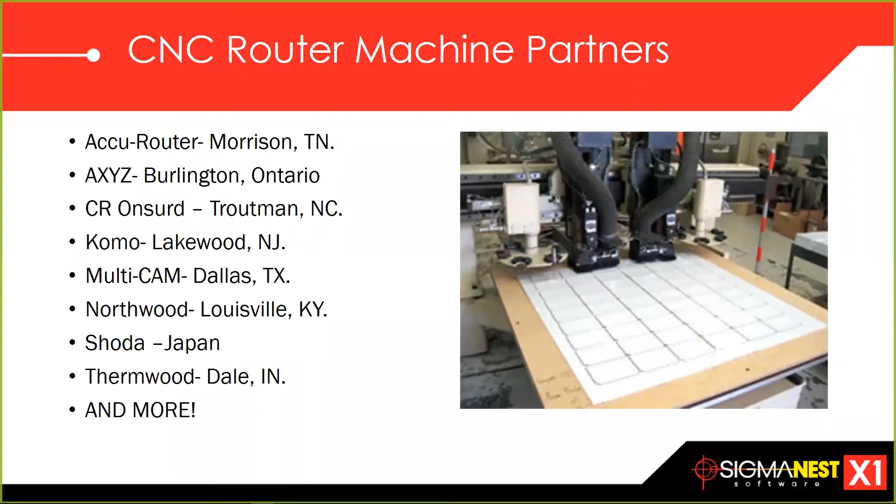All right, so what I wanted to do today is talk about the different tools we have inside SigmaNest that benefit the router community. I wanted to go through some real live scenarios. This first scenario goes way back to when I first got my start into the CNC router world, I worked for a company in Morristown, Tennessee named Burkline, and this is a typical frame that they have.

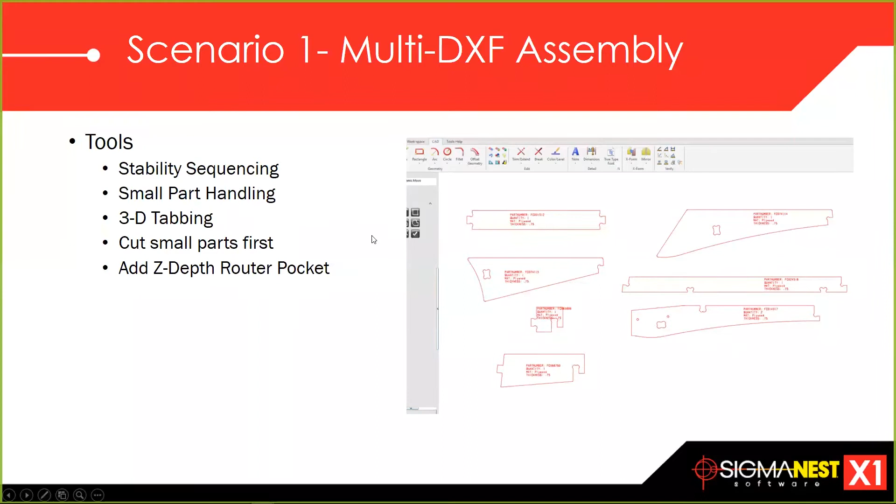So let's go ahead and jump into the technical side, and I'll explain some of these tools as we're seeing them on the screen here. First of all, we're bringing in a DXF. The DXF we're bringing in is a multi-layered DXF that's got dimension layers and all kinds of different things on there. But we're turning those layers off here on our interactive mapping screen.

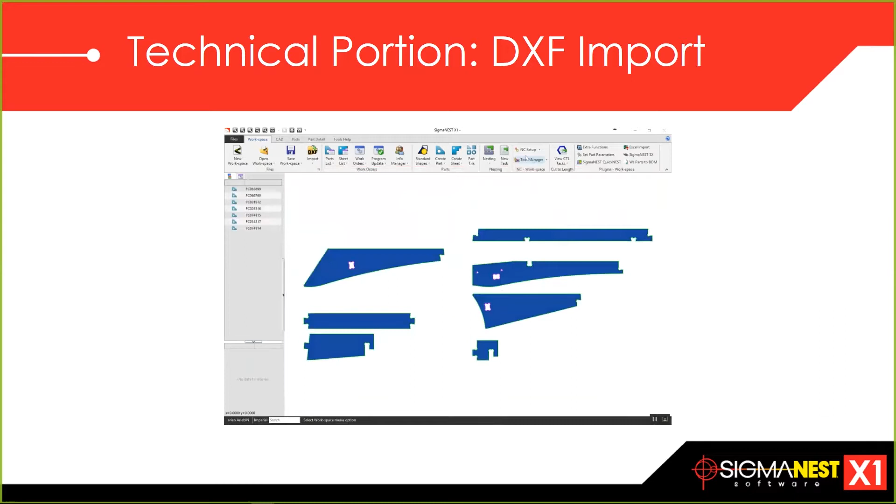I'm also zooming in there to show you that we have some parameters that will automatically be populated inside SigmaNest. Parameters like material, thickness, quantity, part name, all of that can be mapped over from your AutoCAD and brought straight into SigmaNest. Also, we can put grain constraints on, as this particular frame we're nesting is 3/4 plywood.

Going over and building up our nest here, our task, we're going to get 7 complete units in here. I'm using the user 2 nesting algorithm here, and that tends to give me the better automatic result that I'm looking for.

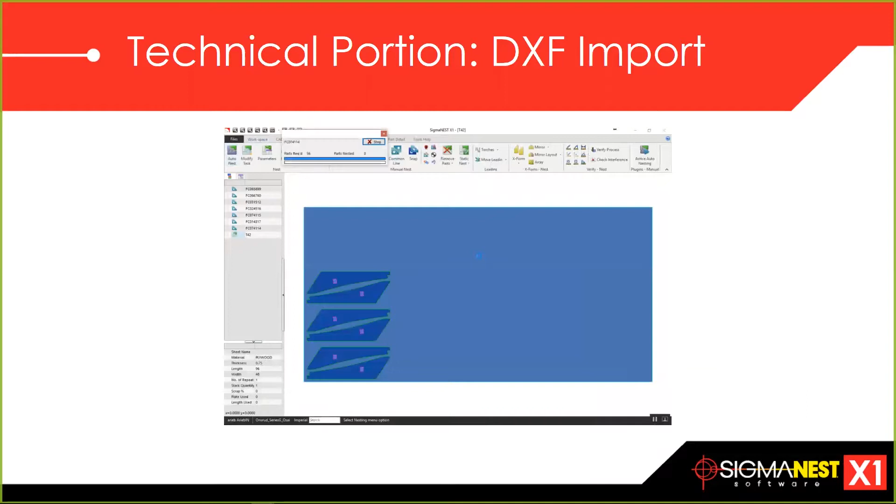Also, we're using a tool called small part handling, so parts that fall under 8 square inches will get a bigger part-to-part spacing. And as you guys know, a lot of times when I'm done, I'll kind of hit the bump command and space out the smaller parts and take advantage of some of that extra material there, so I get a better quality cut. I can do that on the fly - that is a unique tool of SigmaNest that I've always loved as a customer, that I can interact with the nesting.

Here's where the stability sequencing comes in, and we're going to show that and go over what that means in just a second. Basically, what we're doing is moving the lead-ins away from where we've previously cut. So here, we put the drills on there, and that was the first process, the drilling.

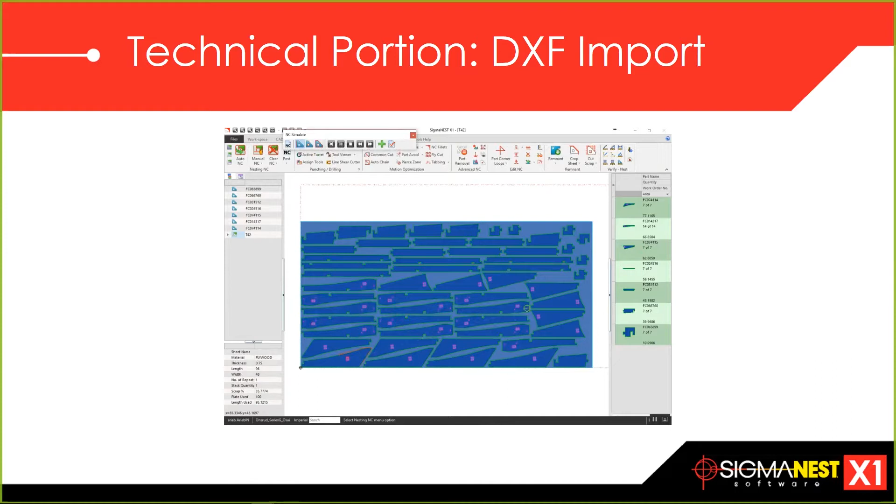Let me zoom in here and show you how SigmaNest is moving the lead-ins away from where we've cut. That means we're going to get a better quality cut with less router movement. This is a pretty amazing function built into SigmaNest called stability sequencing, and you guys can check into that a little bit more later with our technical support team.

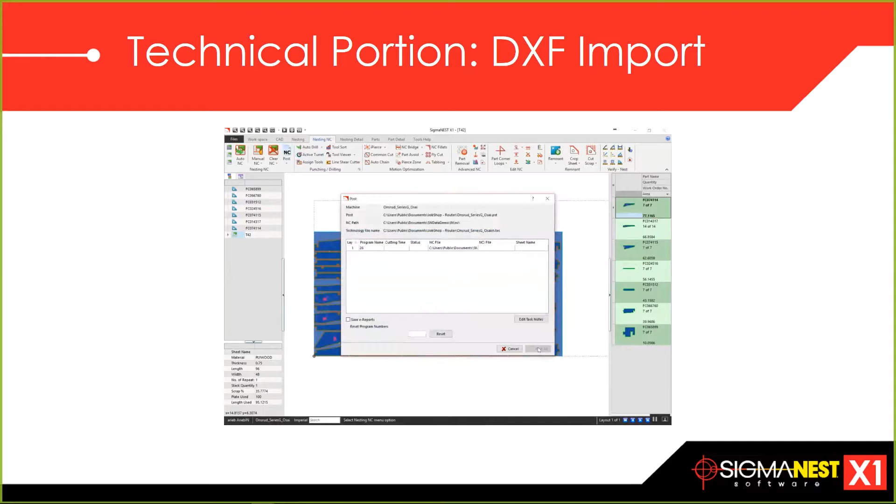We're going to go ahead and post this out here for our router, and then print out reports. That's one of our technical slides there I wanted to show you.

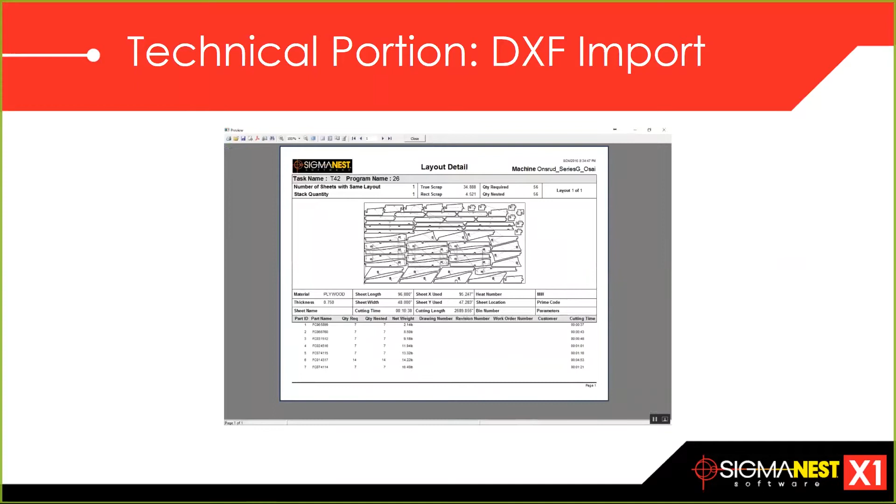All right, so I want to go in a little bit more detail here. The other tool I wanted to show you that I think is pretty amazing is the ability for us to cut the small parts first.

So this is very common. If you can imagine, this is a 4x8 sheet of plywood here, going towards the upholstered furniture industry. I have a series of small parts here, so my nest is all set up perfectly, and I've got some extra spacing built in for these smaller parts to get a better quality, with more part-to-part skeleton holding these parts in.

But what I want to do is cut these small parts first before I cut anything else, because that's when I'm going to have the most vacuum hold down, hopefully, which is what a lot of the customers out there that work with Sigmatek have - routers that have vacuum suction.

So the way I do that is I go over here into the auto NC, and right here there's a button called NC small parts first. You may have come across it before and wondered what it does, but when you check that button, it's actually going to get all the small parts first, and we're going to show that in the first slide, then I'll show you one other thing that's kind of neat.

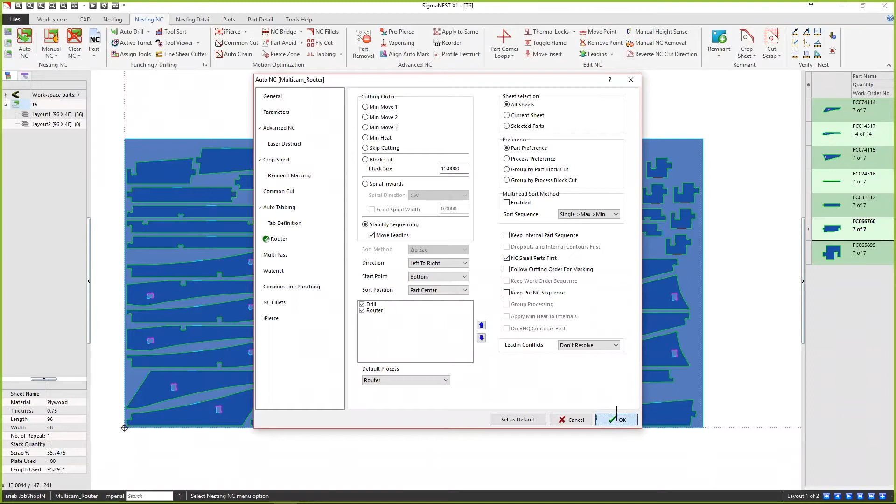So let's do a quick little show here to show how that's going. We're actually using the stability sequencing and the small part handling at the same time. So here we're cutting out the smaller parts first - this is a very common way of cutting with the CNC router.

So we get rid of the small parts, we go ahead and cut them up. You could even tab them in - you can do the 3D tabbing.

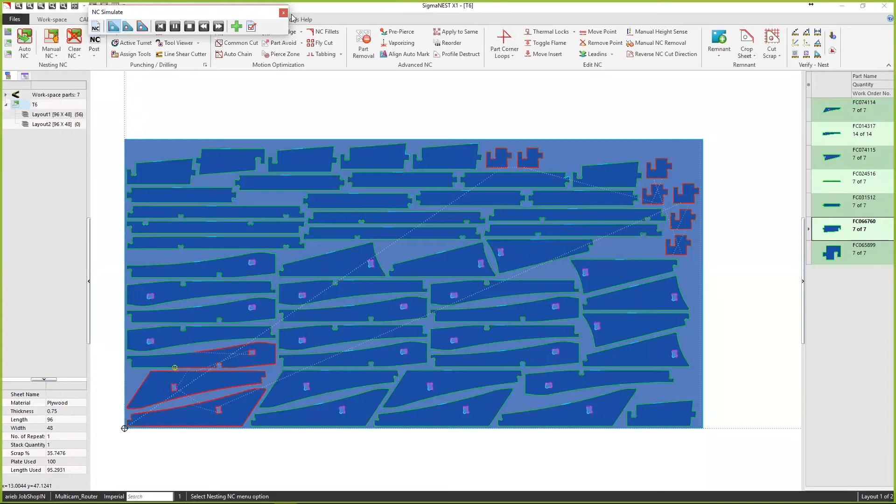Another thing that I like to show when I'm out traveling, and I've seen this a lot, is there's a lot of changes that are made in the design, and some of those changes come in late into the production. What I'd like to simulate right now is a change in one of these parts here.

They're going to actually get a depth pocket cut on this part here. So I can right click and go into part mode, and I wanted to show y'all how we can change the depth of this on the fly fairly easily by using the set depth command inside of Sigmatek.

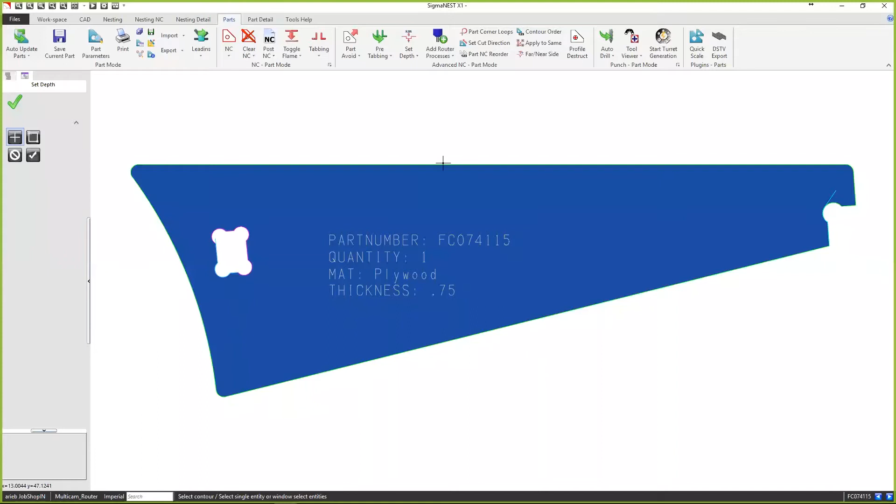So that's located again in the part mode. I just went into part mode on this part here, and under this tab, usually the quality tab is what's coming. So when you first go in there, you hit the down arrow, hit set depth, and then window around the area that you want to change the depth on. A little window pops up, and then you can go down here and maybe set a half depth.

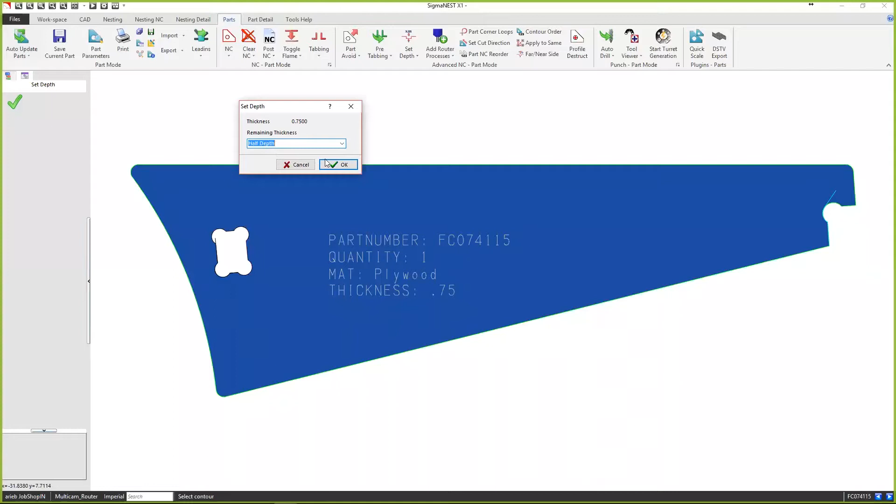And that's really cool because you can change it on the fly. We can go right back here to the nesting, and we can see that change has been made on the fly here.

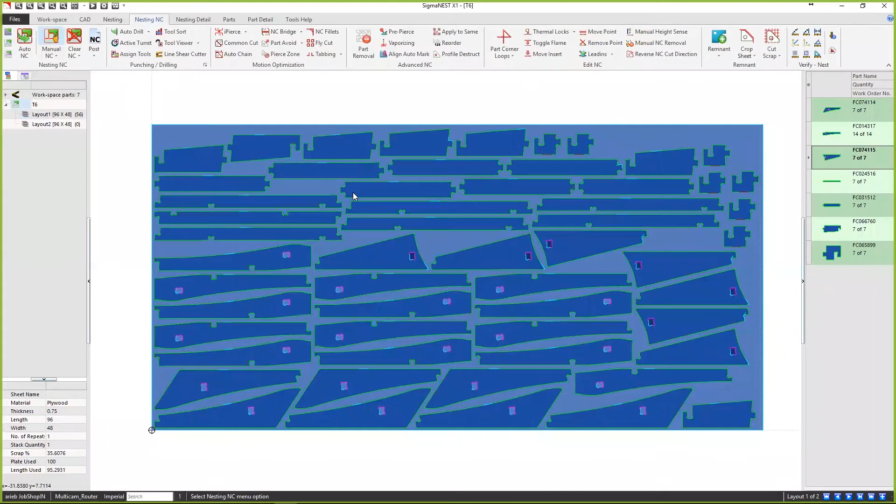So now when I go over here and hit auto nest - I don't mean to hit auto nest, let me cancel that. When I hit auto NC, I already have my pocketing picked out, so I'm going to show you where that's at, right over here under the router tab.

This is something that's automatically checked. If there is some depth cutting, it'll automatically pick up on it, but I wanted to show you where it's at - so we have the auto destruct here turned on. Again, it's a default setting on my computer. So now the router will come in here and do this pocket and go down at that certain depth that I've described. Let me get back here to our screen in a second.

All right, so I wanted to show you those two things. So now we'll go over here and continue. Okay, scroll down a little further there.

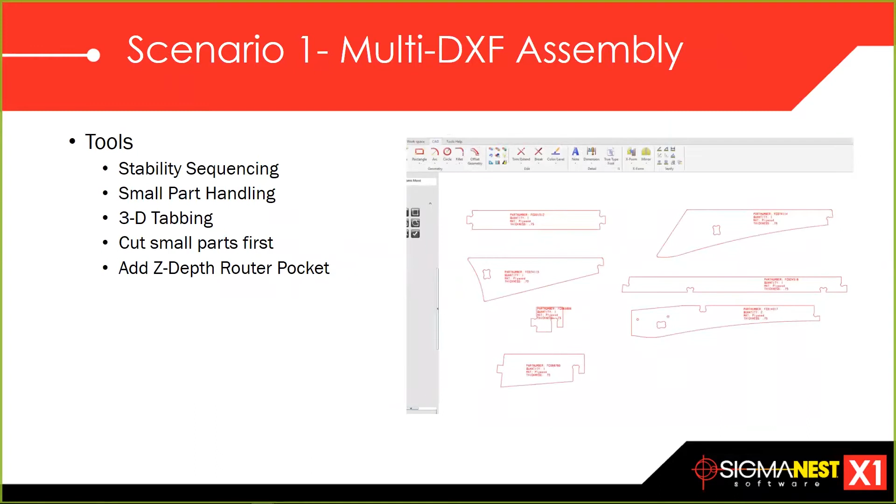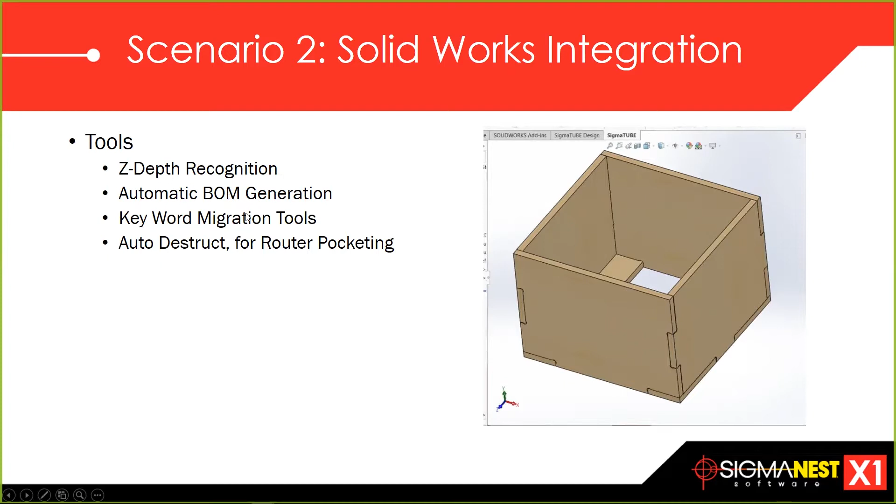So we went over cutting small parts first, 3D tabbing, small part handling, stability, sequencing, and more. Now I wanted to show a scenario with SolidWorks integration. I've designed this inside of SolidWorks, and it would be the same for the Inventor community and all that. I have a little ottoman here that I've designed, and it's going to do some things. The underside of this ottoman has some depths for the leg rails to go into.

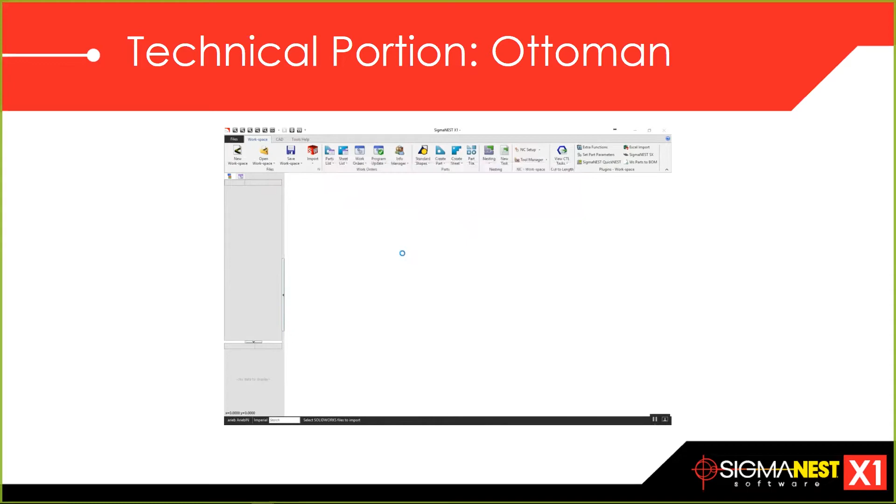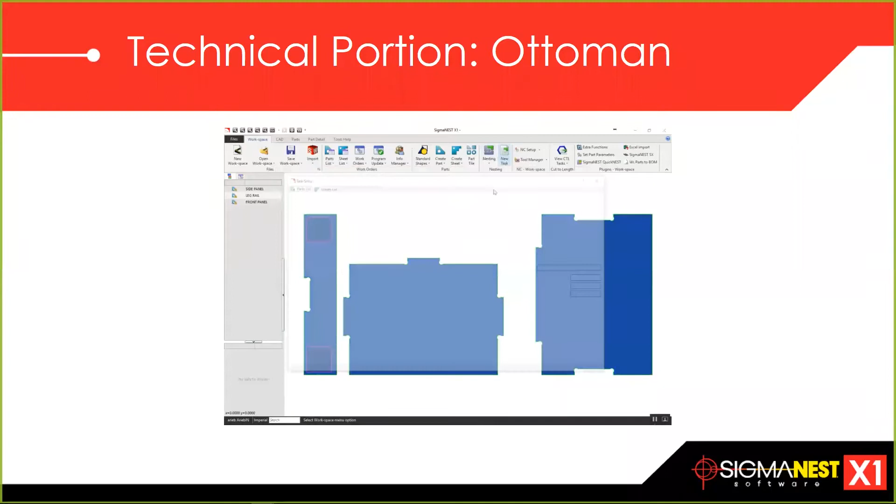Inside of Sigmatek, we can go ahead and import that SolidWorks file. Sigmatek is automatically looking for a SolidWorks assembly file or maybe even SolidWorks part files. This is the solid modeling interface as we're pulling these parts in. What I like about the SolidWorks integration is Sigmatek is able to count the parts that have the same name. You can see these three parts here, there's really two per frame - a side panel, leg rail, and front panel. Now when I set up my job, I can bring that in and put the amount that I want.

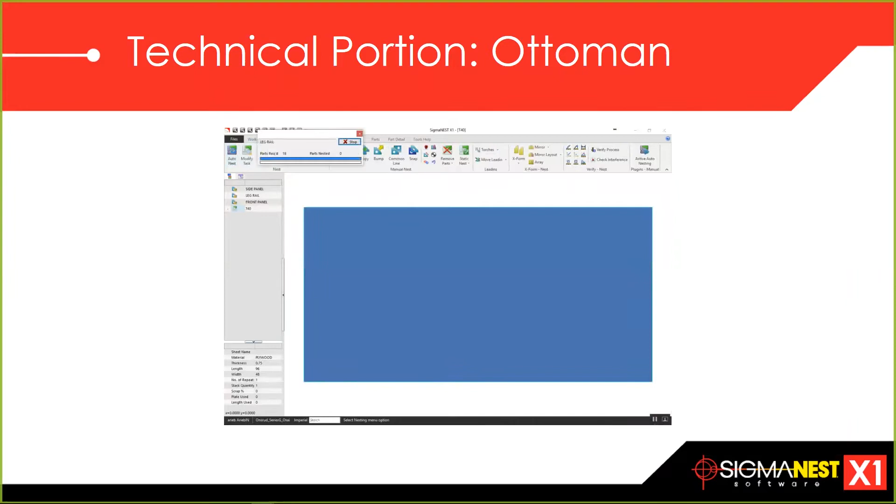Maybe I want to get 3 in a kit here. Again, that user 2 is the most popular one that I've seen most people using. That gives us, when we're cutting wood parts, the best yields. This one here, as you can notice, just like we showed before, there's a depth cut in that leg rail. We already got the router everything set up here as a default, so it's looking for that sort of thing automatically - any depths that might be out there. So here we go ahead and post it, and then it's ready to go out to the machine.

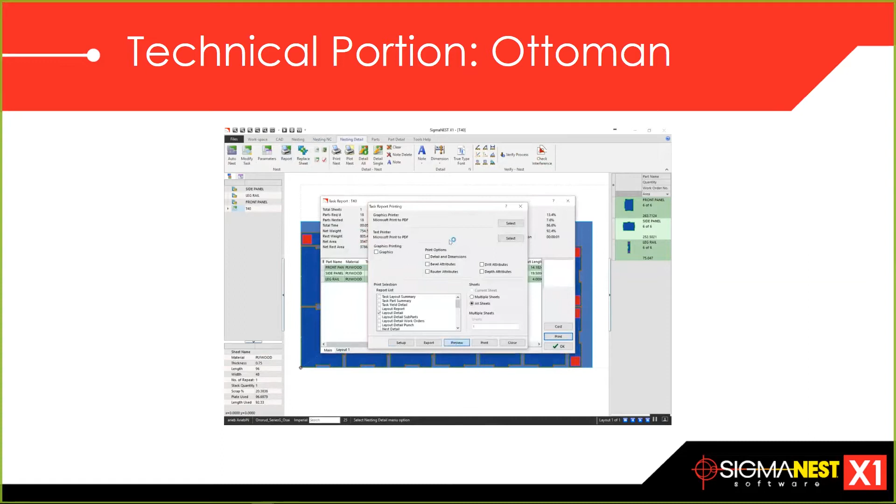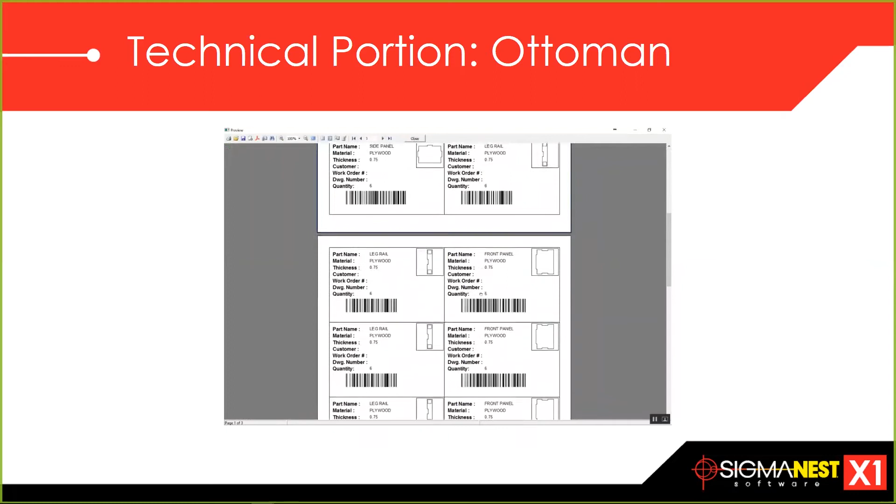A lot of our customers are getting into 3D modeling with SolidWorks, with Inventor. I see that a lot. I see a lot of Solid Edge out there too. Sigmatek here is aligning itself with these CAD packages and allowing y'all to bring those parts in. Here in a little bit, I'm going to show you how we can strip out or maybe not include some of these parts on the migration process.

All right, so this next one here, I wanted to show a little bit of a larger assembly. This frame here does have this 4/4 lumber part. And you'll have to forgive me, but my background is upholstered furniture, so all these tools that we need to drive plastics cutting, metal cutting - there are different tools that are unique for them. But my focus here is just really wood router cutting.

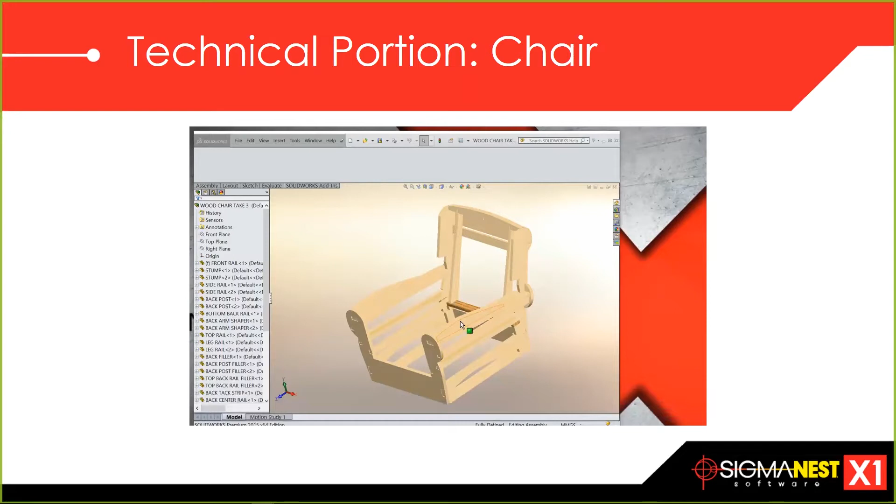All right, so we'll go ahead and do a quick little show here, a little technical. Let's fly out here and show this. Okay, so.

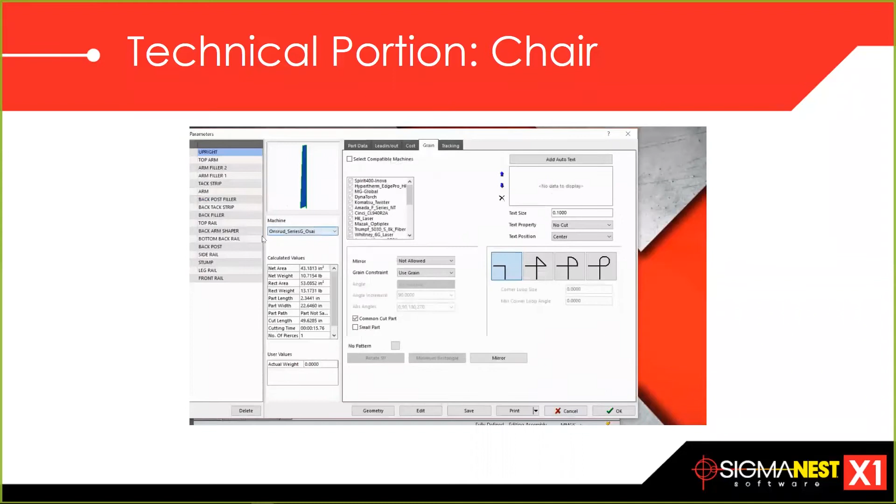All right, so as you can see, this frame is mortise and tenon together. We're going to go ahead and do that import again. Here's the layer mapping screen for the solid CAD, similar to our DXF mapping screen, except there's a little bit more functionality embedded into it. If you all are out there and you're using SolidWorks, or you have engineers using SolidWorks, and you're wanting to align Sigmatek with them without having to go by DXFs, then definitely give us a call. We'd love to help you bring those parts in.

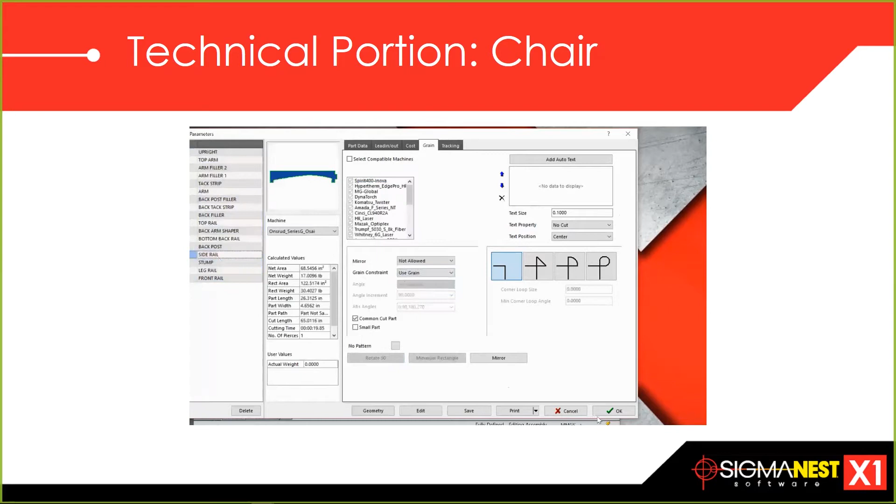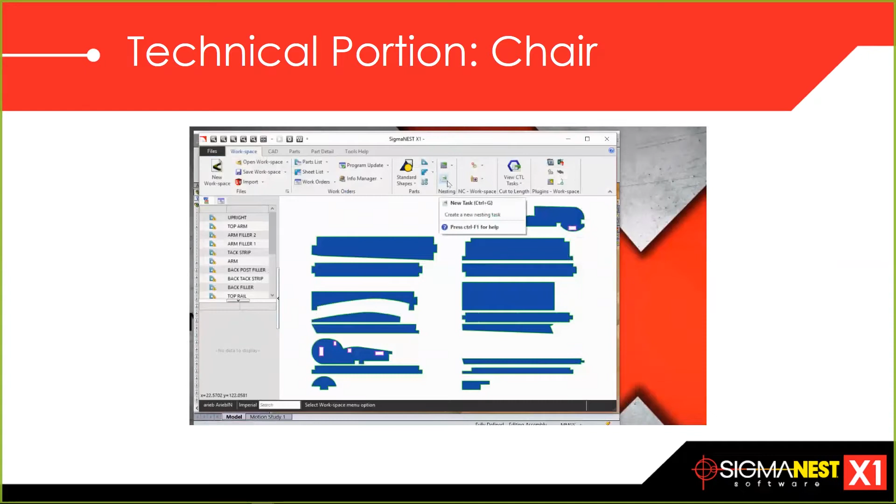Automatically, we're able to see the thickness, the quantity, the material settings and all of that. So here, let's go ahead and build up a quick nest with this one, a new task. We'll grab our parts, give it a kit there. We'll try to get 5 of them in a sheet here. We got 4x8 sheets, put 3 sheets down.

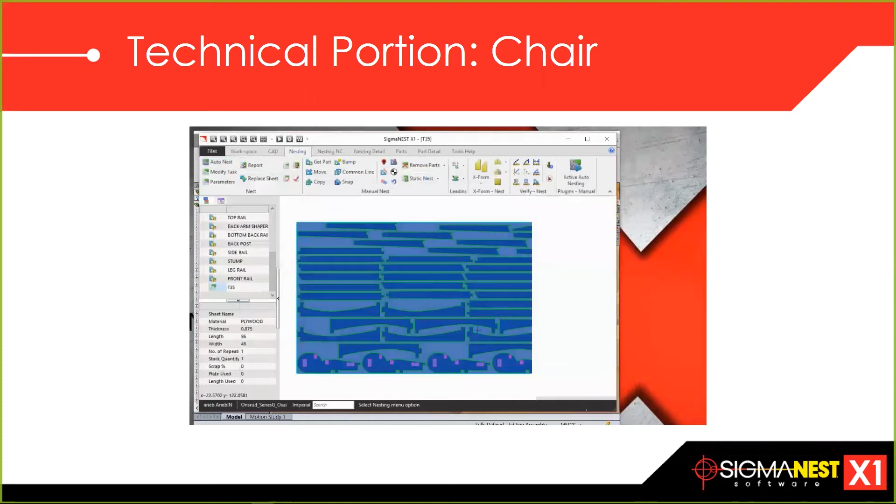Now, we do have a multi-pane window now where you can see all three layouts at the same time. You can even move parts around from layout to layout. I don't know if y'all are familiar with that, but that's something that you might want to check into. Another tool here, this tool was made for us probably in version 10 early - it's multi-pane. Go ahead and post that code out there, and that completes the process once we've had our reports.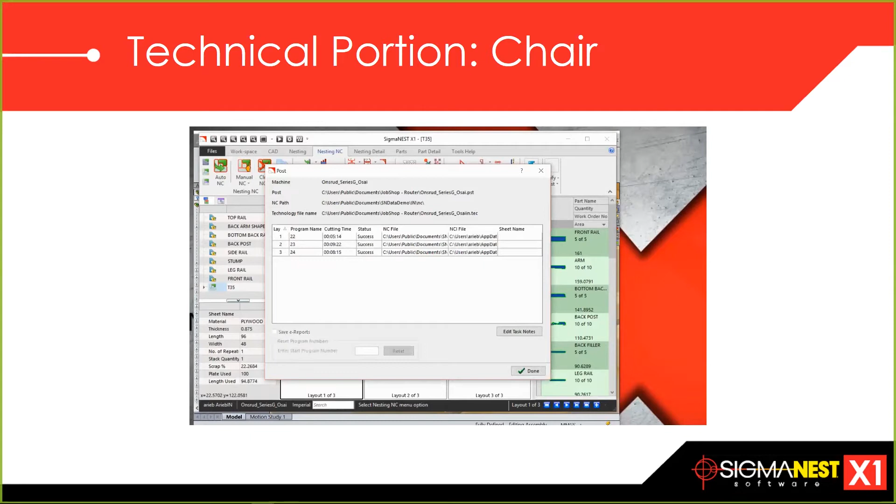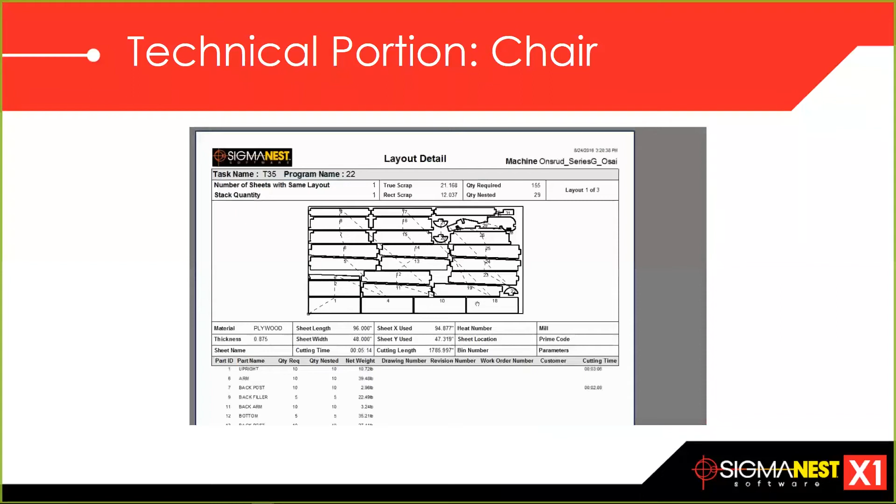We'll show a screenshot of our reports here. The layout detail and part label are our most popular reports for our manufacturing community. Cycle times, yields, all of that information is displayed on your layout detail.

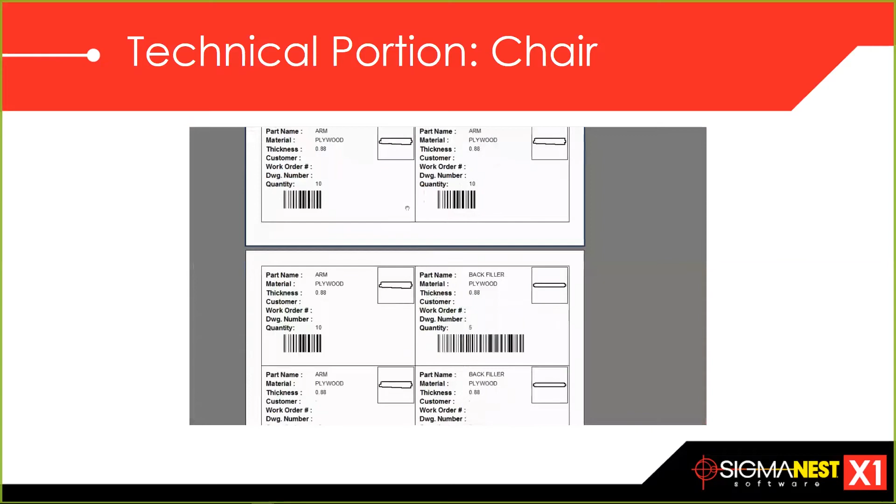I hear a lot from my customers out there wanting to configure the cycle times for Sigmanest to give better, more accurate cycle times, and our people on the desk in technical support can help you and show you where that information is and how you can put that information into Sigmanest to get more accurate cycle times.

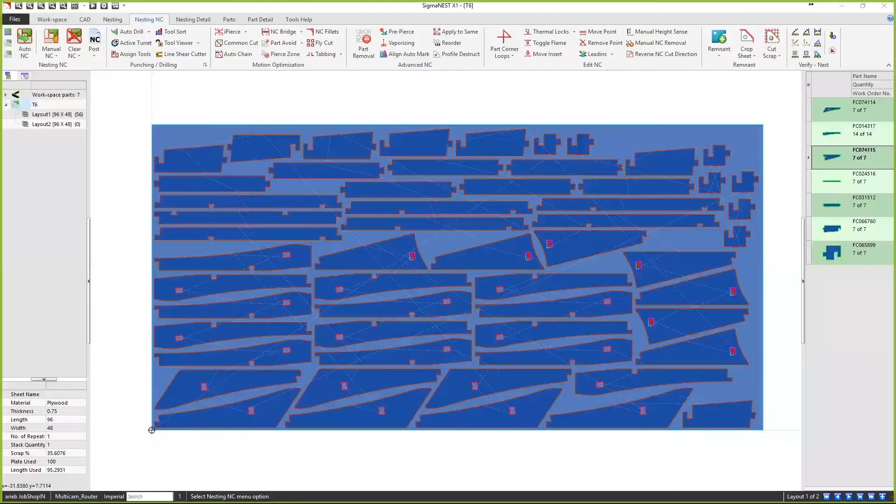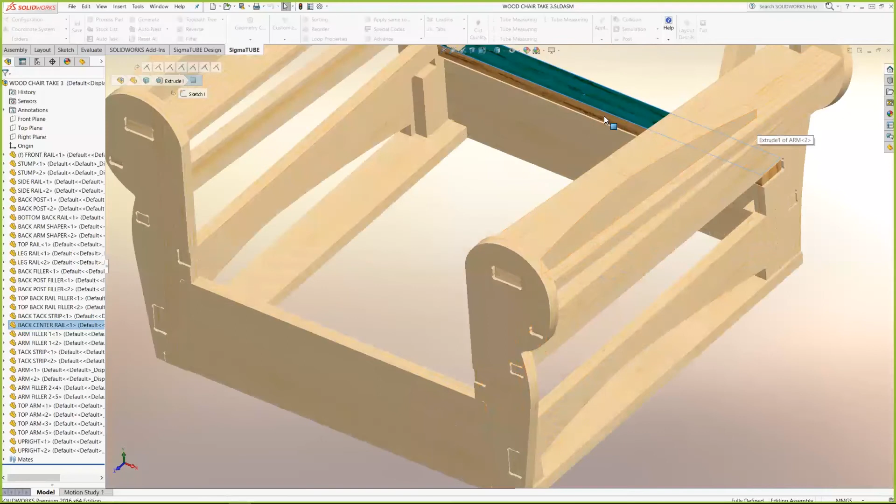I wanted to show you here in SolidWorks where to put the keyword. This is SolidWorks, so inventor and Solid Edge users will have another way, but it'll be similar. All these parts here are parts I want to go over, all the mortise and tenon and plywood stuff going over to the router, but this 4/4 lumber piece coming from the rough mill or the lumber yard, that's not going into Sigmanest.

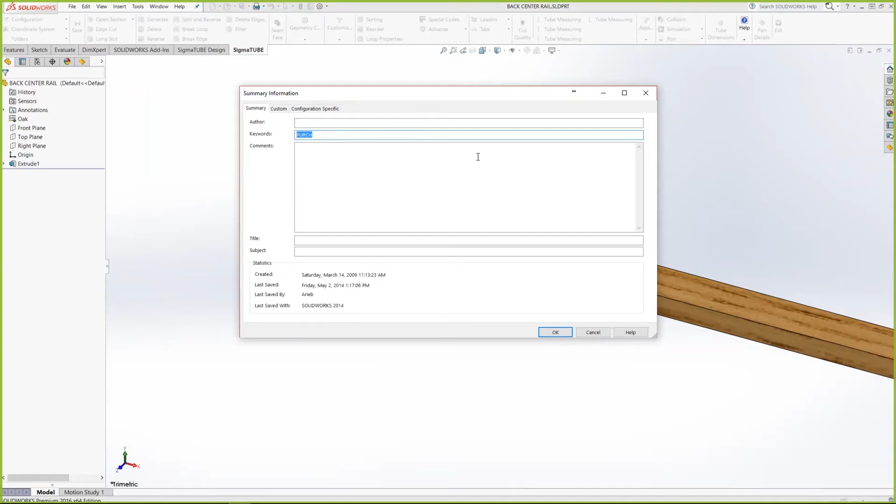So I can actually embed a keyword in there, and I'm doing that right now, opening up that part file. Over here under File, under Properties, for those familiar with SolidWorks, we have a keyword field here, and I can put anything I want. In this case, I use the word perch. Then I hit OK.

Over inside of Sigmanest, let me open up Sigmanest. When I import that SolidWorks file, and I pick this here and hit import, that's how I align Sigmanest to SolidWorks on the Sigmanest side. The screen is coming up in just a second.

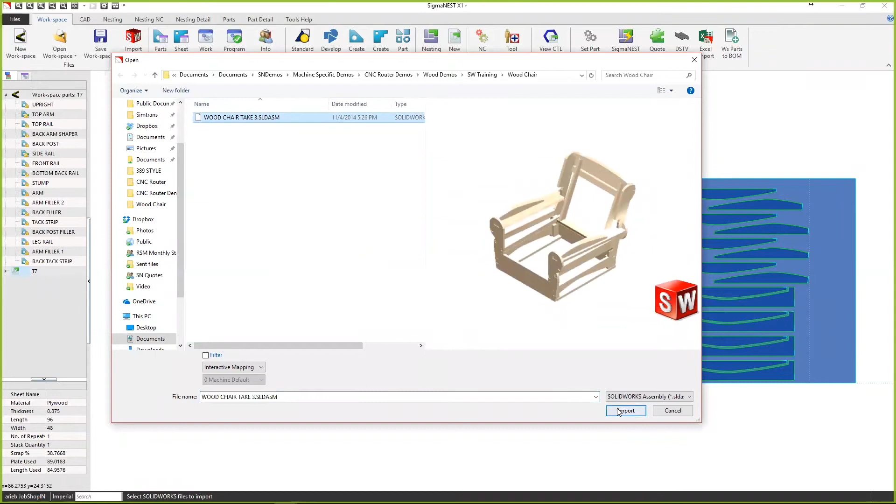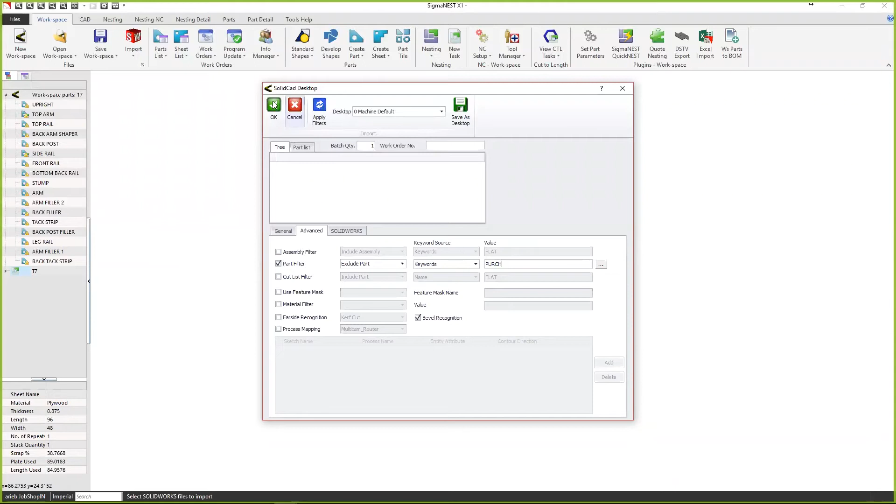Let's go ahead and get rid of that other section of Sigmanest. There it is. All right, so where that is right here under SolidWorks, or I'm sorry, under Advanced, I can use the part filter and say exclude parts that have the keyword, and this is where I would put in PURCH. Once that's done, it will exclude all these parts, so if you have nuts, bolts, T-nuts, whatever, they won't come over.

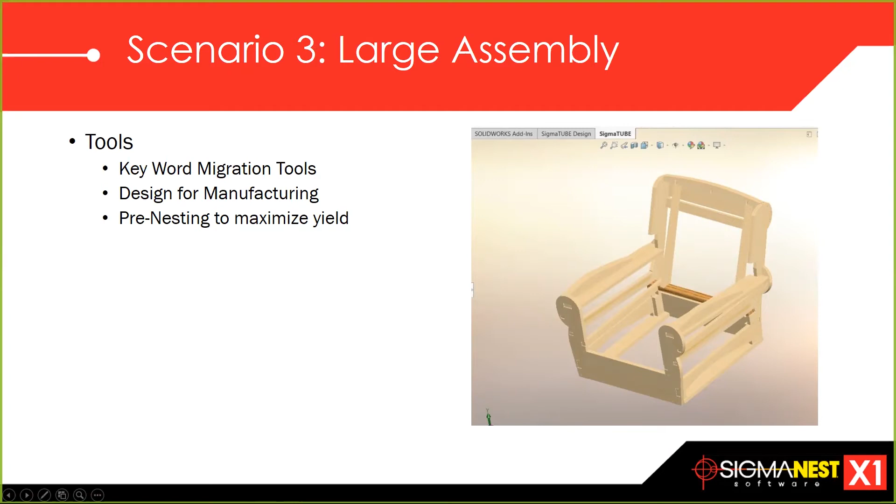Now, the other concept I wanted to share with you guys, just as a bonus, because I do like talking about this sort of thing, is this design for manufacturing keyword. So that's what I want to show you now. When I designed this frame, I actually made the leg rail that is in that frame. Inside this leg rail, where it goes in the frame, it's okay if I had a little bit of a cutout, and I'm actually nesting a part inside that I actually need right inside that leg rail. So I'm able to do that.

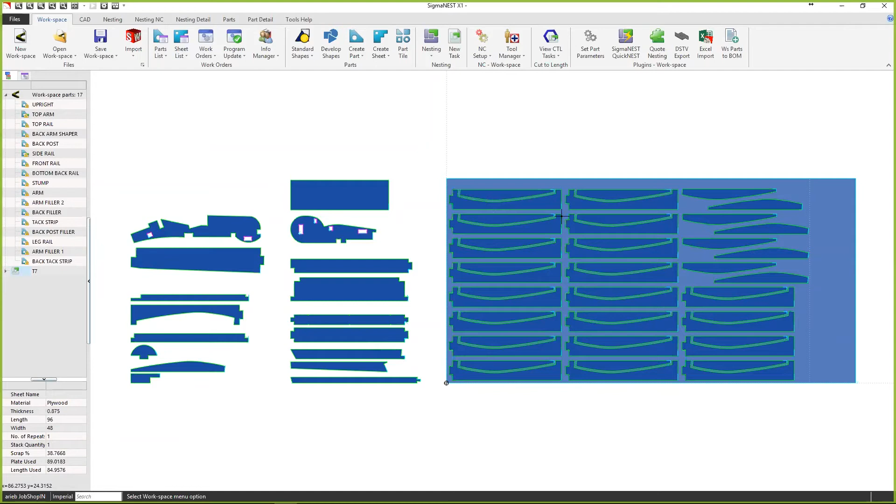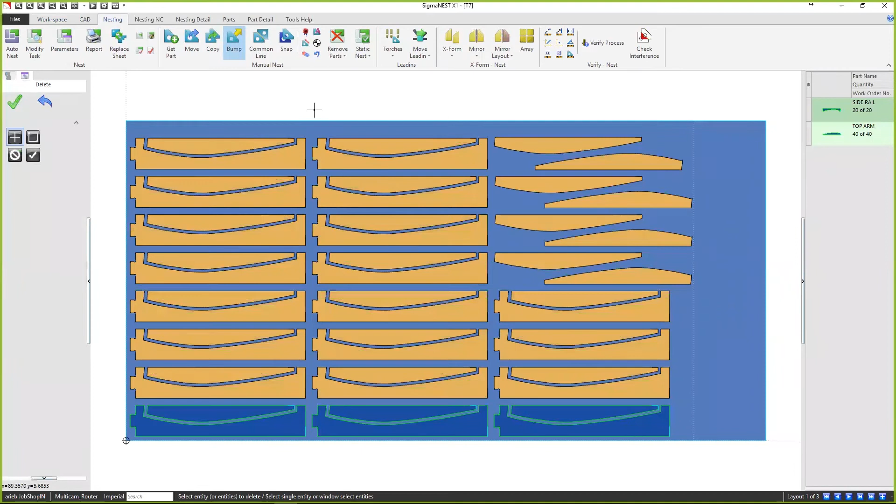I don't know if you guys know how to do this, but there's a way, if Sigmanest isn't picking up on that, you can actually make it work. What I've done down here, I'm going to delete that out now, but we have the ability to set this up the way I want. If I wanted to, I could delete out all of these just for fun, and I could set up one the way I like it. I could float it in here and do that.

And then what I do is hit the snap button, highlight this here, right click, and say add as a pre-nest. Then when I auto nest this, it'll nest that way. I don't know if you guys know about that, but that is a neat little function inside of Sigmanest that you might take advantage of. That's called pre-nesting to maximize the yield.

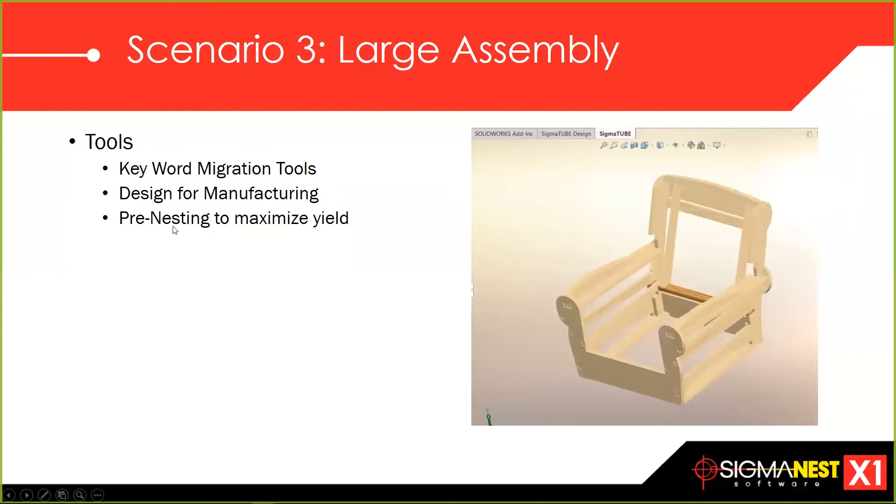Okay, all right. So once Sigmanest is purchased at your facility, and I know a lot of my customers out there are in this meeting, but for those of you who are new to Sigmanest, we do have a focused engineering team that goes after the routers. It's a very unique cutting process, and so we have people trained in that sort of thing.

So we're going to set up, if you're a brand new customer, an on-site training for 4 days, and we'll teach you how to use all the tools. It is focused. We'll help you with the tooling setup, how to set up the different drills that you might have, the different shaping tools that you have, and all that. We'll help you with the tooling setup and teach you how to do all that.

Also look at some of your production parts and do some production programming, send those out to the machines and certify them. And then a lot of times we'll do a manufacturing process map, where we might get a blue board or dry erase board up and map out your current production and some ideas of how you might benefit using Sigmanest in the process. Maybe we'll cut out some steps. That's a neat thing to do, maybe on the last day, or even before our engineer project manager gets there.

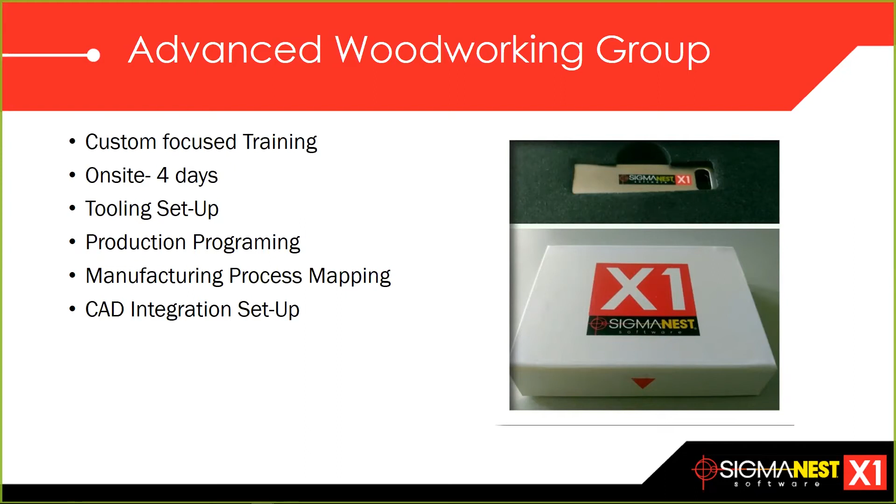All right, so after the sale, support and tools - we have two support centers in the U.S., at our corporate headquarters in Cincinnati, of course. That's where most of our engineers are located. Our operations team is currently led by Sean Burton, great guy, and his team of people. They're there to answer your phone calls, and they start their day at 8 o'clock in the morning Eastern. We also have our office out in Redmond, Washington, which we call the Seattle office. There are several engineers over there too, so there's a good chance if you call tech support, you could be getting one of those good engineers.

Today we have over 250 engineers, developers, and programmers, and all of us have unique backgrounds. Some are routers, some are lasers, some are previous users of Sigmanest now working for the company.

And we do have senior CNC router engineers available for on-site consulting. One thing I'd recommend to a lot of our customers, if you're using an older version of Sigmanest, say version 8, 9, or 10, you might consider having an on-site. We do a two-day on-site for routers. It's router focused, and it's really for customers that currently have maybe one person who's been through the training, or maybe you're just wanting to upgrade from version 10 to our latest version 11 or X1. I'd highly recommend a two-day on-site to make sure everybody's taking advantage of all these different tools.

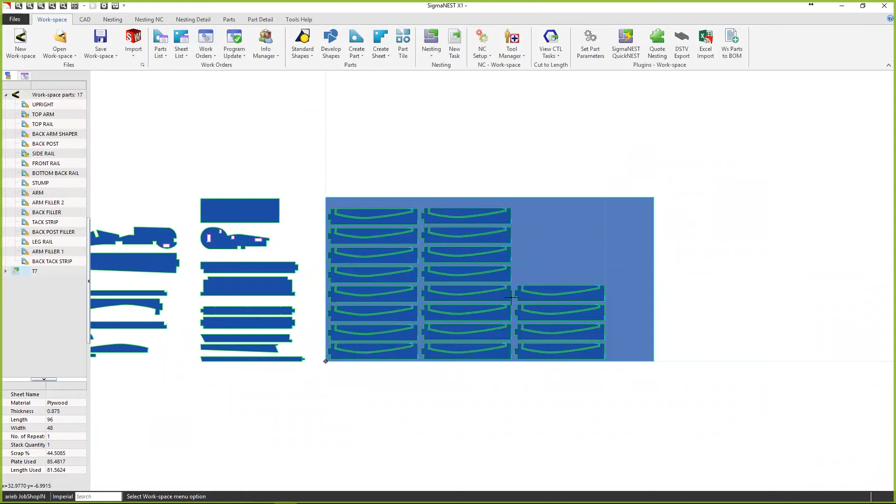Okay, so Benjamin asks: when you set up the pre-nest, does that stay in for future nests? So I think what you're saying, Benjamin, is - let's look at what he's asking. If I were to need this again, or wanted to run this again, would this pre-nest be available? The answer, I believe, is no, because I've set up that pre-nest inside the task for this one. So if I were to set up a new task and ask for these parts again, I wouldn't see them arranged in that same fashion.

Okay, Chris Cole has some questions in a second here. So Nathan King asks, how do we organize an X1 installation on site? Can someone install it on our physical server? The answer, Nathan, is yes. We have a new service that we're doing for our customers. You can either have us do it remotely, or we can come to your facility - it really depends. If we do it remotely, our engineer or project manager will take over your desktop, load the new version of Sigmanest, the latest version, and migrate the post processors and the SN database all over to the new platform. Once he's done, he'll schedule a 4-hour web-based, router-focused training with you, going over the tools unique to you that would be of particular interest, and that training is customized. So that's a good question, Nathan.

Okay Chris, is there any way to apply multiple tool paths to the same geometry?

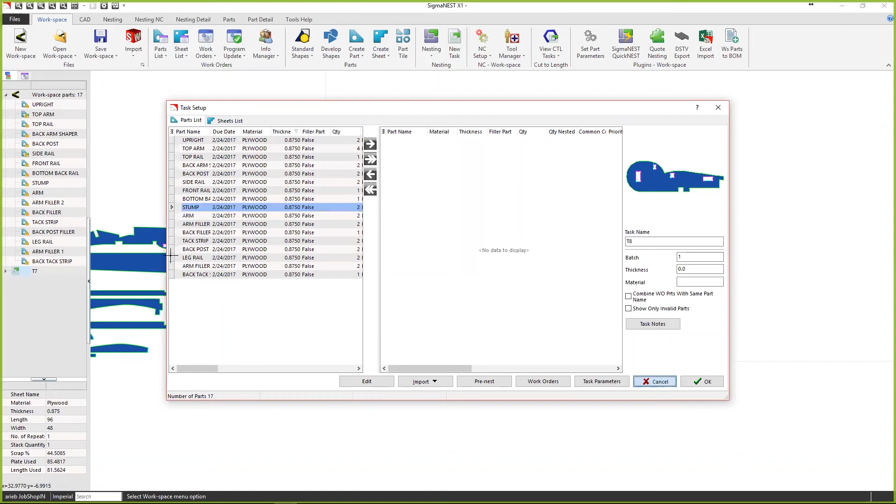Is roughing possible? Yes, absolutely. A lot of our customers do that, and I'll refer that question for a follow-up, but you can definitely add roughing passes. There's multiple passes, and we can add different tools. I have a customer in the Carolinas with small relief cuts - they use a bigger bit to hog that out, then come back with maybe an eighth inch diameter bit to clean that area up.

Chuck Watson - we've got a lot of parts that need fine tool cleanup, multiple nests because they're different passes. I can set up speeds and plunge, but it's very difficult. What do you recommend? That's a good question, Chuck - similar to what Chris had, where he's trying to clean up these areas with other tools.

There are particular people at Sigmatek that I'd recommend you talk to when you call tech support. One that comes to mind is Lloyd Lischentritt - a lot of you might know about him, but he's particularly good with the routers. Also, if you call in and you're talking to someone with more of a laser background, please ask to speak with Sean Burton or the manager, or someone with a router background - they should get you in touch with the right person.

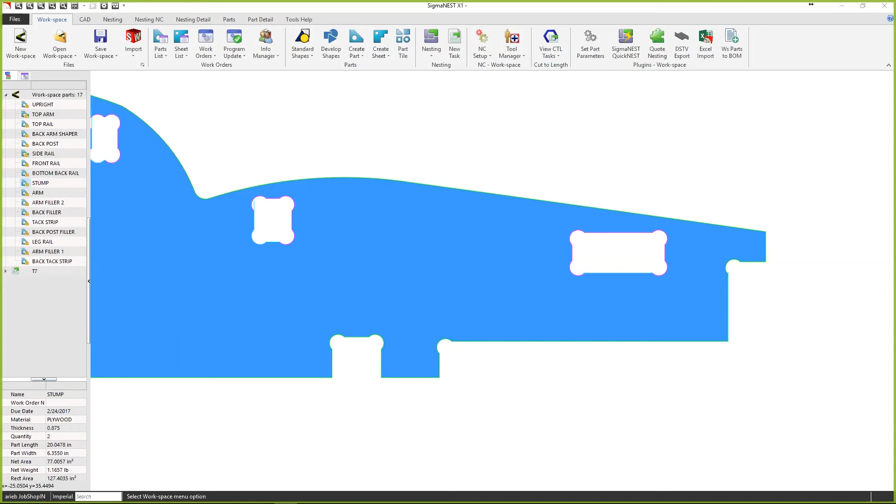That's a good question, Chris - why are the feeds and speed settings under the tool manager not used? Only the feeds and speeds in the tech tables are respected. I'll answer that in a general way: in the tech tables, each material can have up to 3 different feed rates, and we're really basing that on the feature size of what we're cutting.

So if we're cutting with a 3/8 cutter bit and cutting a 1-inch diameter hole, we're going to interpolate - we might cut that at a feed rate of 50 IPM because that gives us the best quality cut. For a larger feature size, like an outside diameter cut, that might be at 400 IPM. If we applied 400 IPM to that 1-inch hole, we'd get an egg or oval shaped hole result, which isn't what we want. So we give you the ability to slow down or have 3 different feed rates based on feature size.

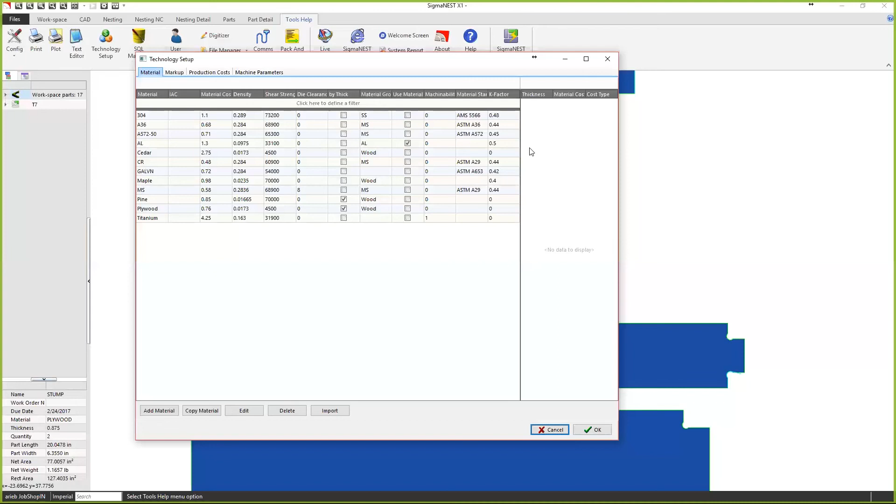The feed rates located in the tool manager - I'll have to get someone from the tech support team to help on that one, I'm not really familiar with the answer. I know in the tool manager you go in and look at the milling tool - let's open that up here.

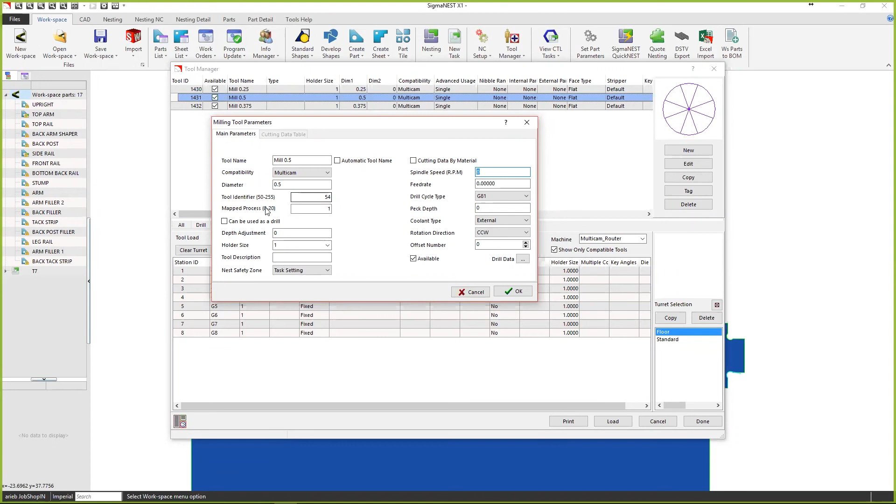There's a spindle speed here that's important, and mine is zeroed out. My experience tells me the feed rate wouldn't come from the tool manager, but from the tech table, because we're looking to align the tool with the material we're cutting. If I used this same half-inch mill tool for cutting through half-inch mild steel, there'd be a different feed rate for that. So I think that's why Sigmatek has your feed rates come from the material or tech table - based on the material and not so much on the tool manager.

I'm looking at some more questions here as I pause. Is there any way to do an isometric view to verify the depth of cuts and lead-ins?

Chris, that's a great question. Right now, in our Sigmatek package, we don't have an ISO view that does that, but I can tell you there's a team of engineers working out of the Seattle office, led by Paul Akita, making a product called SolidX, I think is what we're going to call it. That will be used for routers and beveling and other machine processes we're supporting, with 3-dimensional ISO views. So that's something coming, Chris, on the horizon.

Juan Lopez asks about G-codes to download, I'm thinking he's saying laser machine. I'm not really sure your point there, Juan, but when we produce our codes, we do output the G-code that would drive the different machines.

Chuck Watson asks, who was the router tech you recommended? A good one is Lloyd Lischentrit, and he's really good. You can get his contact information from the tech support team.

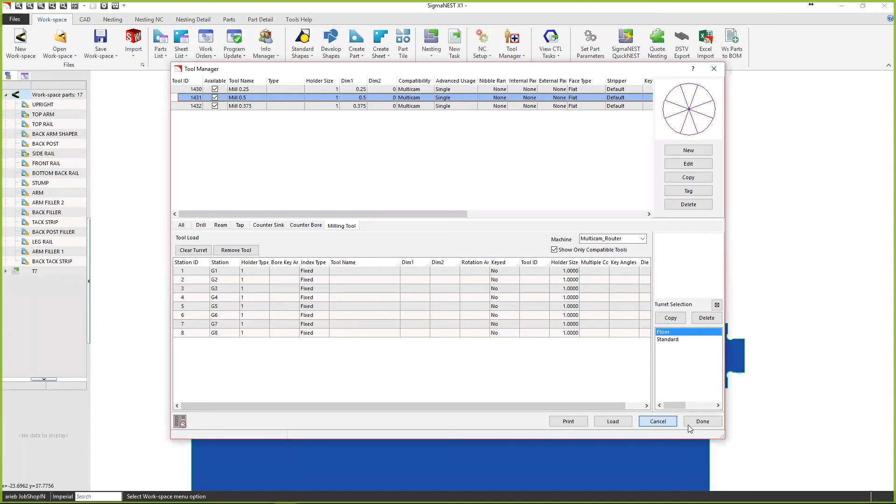When you're doing your nest and you go over to parameters, Chris is asking why it says, say, number of torches. Really, for us in the router world, it's number of spindles. So for those out there with multiple spindles, some of the Shodas I've worked on have up to 4 spindles. The Komos and the AccuRouters might have 2 spindles. But this word here, just disregard that—it's really going towards our 6 other types of machines that we drive, which all cut with fire or water. It's a schematic; I wish it would say spindles here, but then our laser people would wonder.

Is there a lot of router, multi-pass, multi-tool upgrades coming in future versions, and news for a release date? Chuck Watson, that's a good question. Yes, just stay tuned for that—we are working on new tools for multi-pass and multi-tool. I think a lot of that's going to come out of SolidX when that's available, and I'm not sure exactly when they're going to release it, but I'd imagine probably in the next year or so. That's not to say we're not going to add new tools to this version though; we are still actively supporting our Sigmatek, what you see on the screen here.

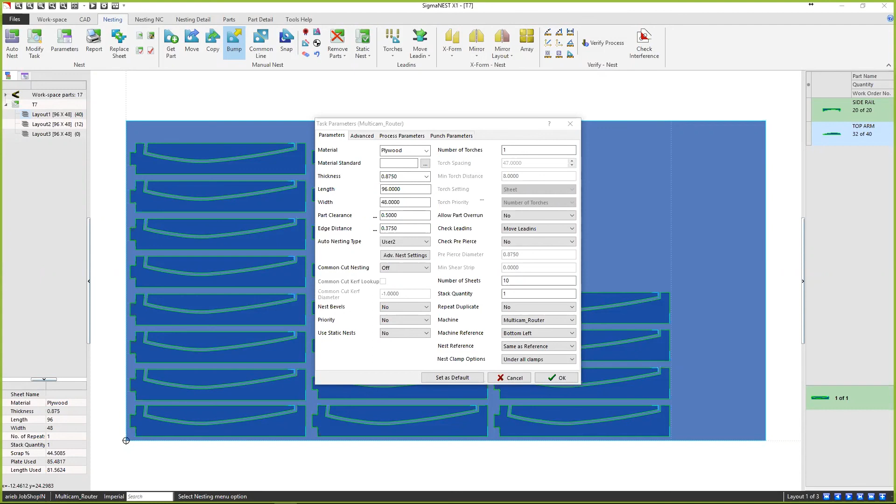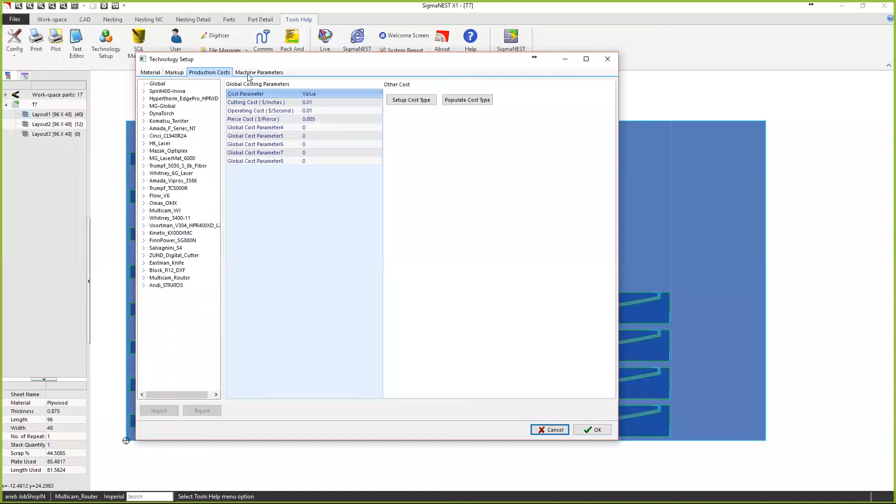The material information in the tech table is really for production—machine speeds, feeds, and machine parameters. So if you go to the production machine parameters and go down to the Multicam router, you have material tables there. That's the material table. This area is driving feed rates, plunge times, spindle speeds, and stuff like that—really machine information.

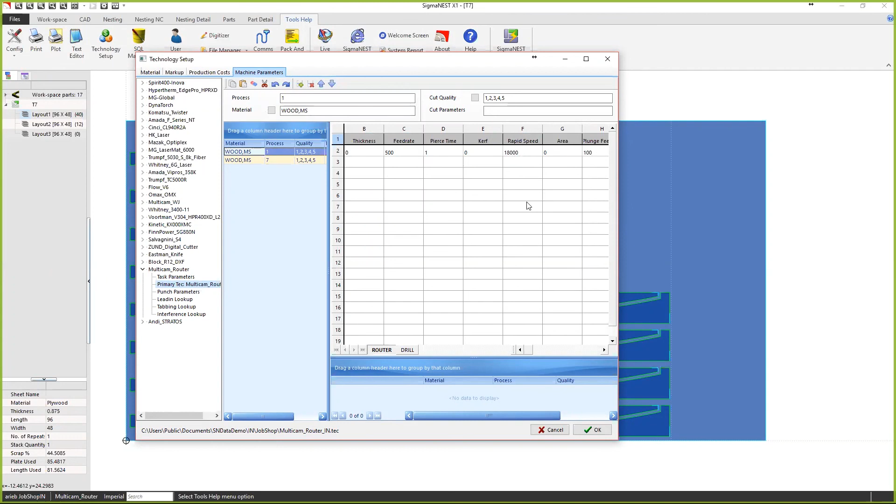The other location you mentioned is under the sheet manager. They're aligned—when you grab a 3/4 inch piece of plywood from the sheet manager, that's going to invoke all the settings from the tech table for that 3/4 inch plywood: feed rates, spindle speed, and so on. So really it's 2 separate functions working together.